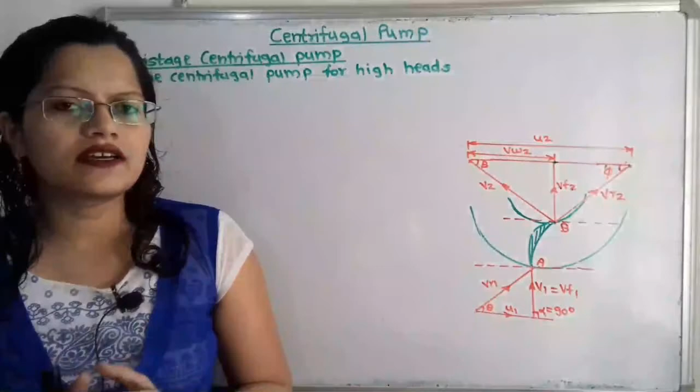In this video we are going to solve a problem of three-stage centrifugal pump for producing high heads. But before that we will understand the construction diagram for the multi-stage centrifugal pump to produce high heads.

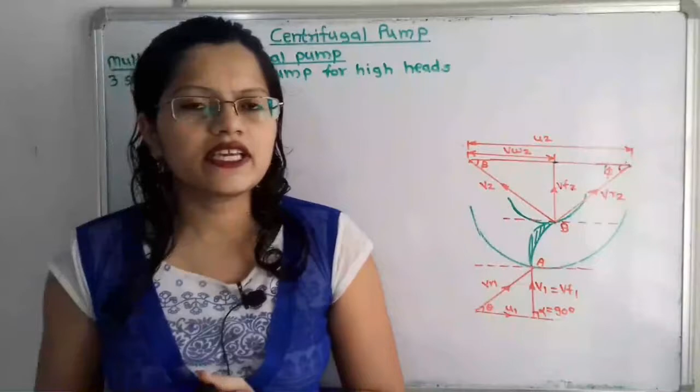If we observe this diagram, the impellers are connected in series, or we can say they are connected on the same shaft. At the entrance of the first impeller, water is entering from the suction pipe and it is getting discharged to the first impeller. So what is happening during this process?

When the water passes from the first impeller, its pressure is getting increased, and with the help of the connecting pipe, this increased water pressure enters into the second impeller. Again, when it moves to the second impeller, its pressure is getting increased.

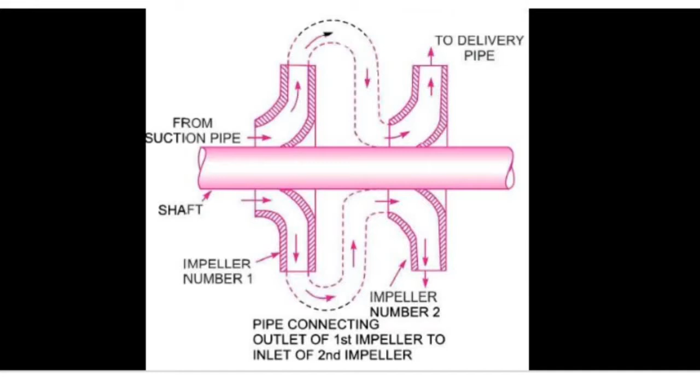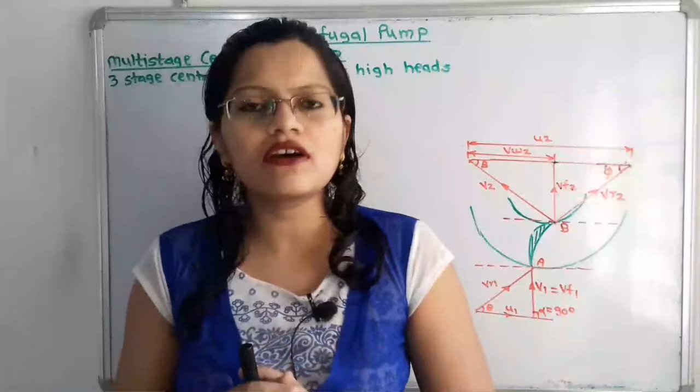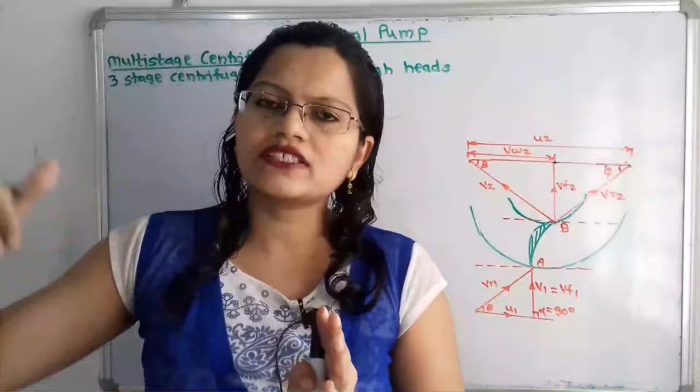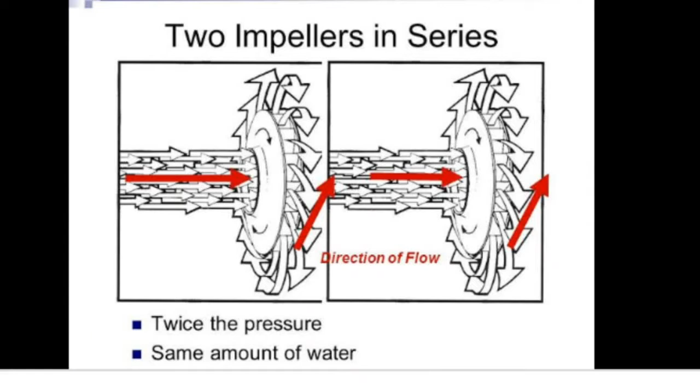If we compare the pressure between these two impellers, the pressure in the second impeller is more than the pressure in the first impeller at the outlet. So if a number of impellers are connected in series, the pressure keeps getting increased, and when the impellers are connected in series, the discharge passing through each impeller will remain the same. So we are going to produce high heads, but the discharge will remain same.

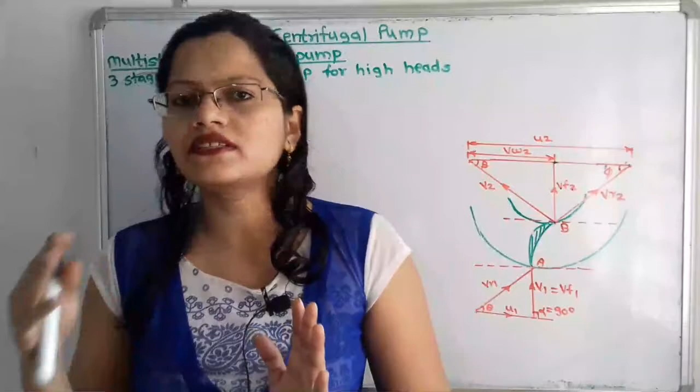Now I will read what is the given problem.

A three-stage centrifugal pump has impellers 40 cm in diameter and 2 cm wide at outlet. The vanes are curved back at the outlet at 45 degrees and reduce the circumferential area by 10%. The manometric efficiency is 90% and overall efficiency is 80%. Determine the head generated by the pump when running at 1000 rpm, delivering 50 liters per second. What should be the shaft horsepower? So this was the given question.

Now we will understand the given data and we will also take the reference of the velocity diagram for this centrifugal pump. For how to draw the velocity diagram, the link is given in the description box, please refer that video to draw this diagram at the inlet and outlet tip. Now what is the given data here?

If we observe, the number of stages n is equal to 3, then d2, the diameter at outlet, is 0.40 meter, and width is also given, that is 0.02 meter. We have to use the standard unit, that is meter, so when these dimensions are given in millimeter or centimeter, we have to convert them into meter.

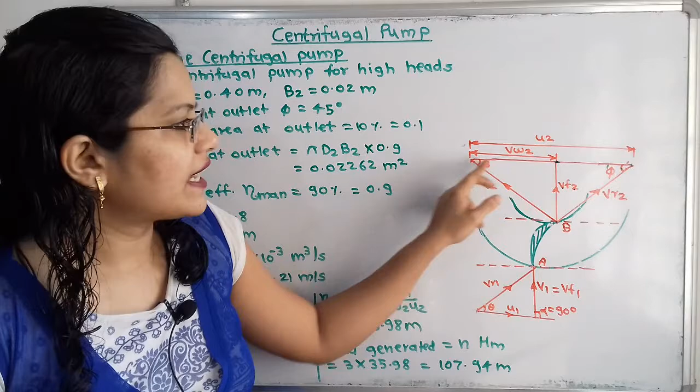Then the vane angle at outlet: it is given that at the outlet tip it is curved back with this tangential velocity at an angle of 45 degrees. This is the vane angle at the outlet tip, denoted phi, and phi is equal to 45 degrees.

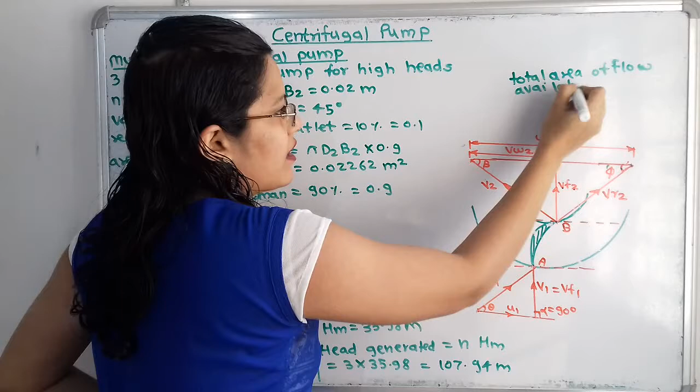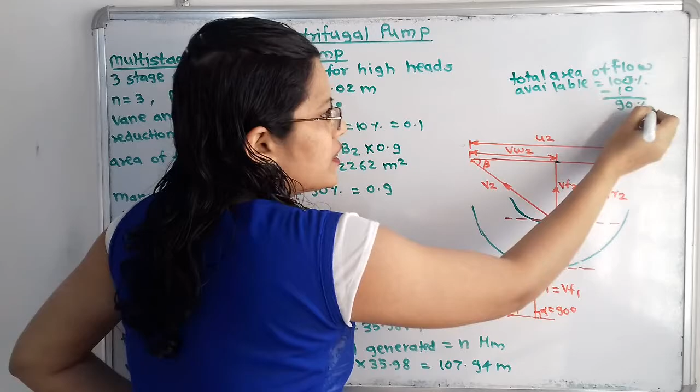Then reduction in area at outlet is 10%. So at outlet, what is the total area of flow available? Suppose we consider this as 100%, then there is a reduction of 10%, meaning we have to subtract, so the total area available is 90%. Initially there was 100%, but there is a reduction in area of 10%, so the total area of flow available is 90%. Now what is the area of flow at outlet?

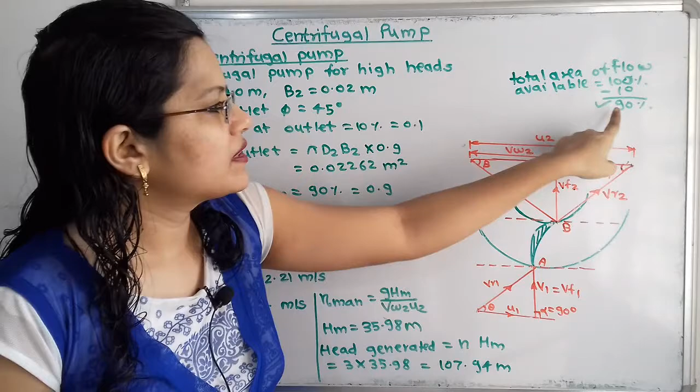For that we have to write the total area of flow, which is calculated as pi d2 b2. When we calculate pi d2 b2, the total area of flow available is 90%, which is equal to 0.9, that is 90 by 100. So we have to multiply by 0.9 because this is the area available for flow, since the condition given is that there is a reduction in area at the outlet. So it is pi d2 b2 multiplied by 0.9. d2 is there, b2 is also there, so which is equal to...

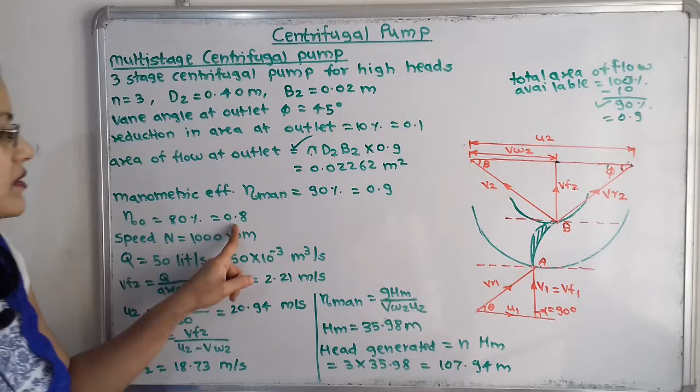0.02262 meter square. Then manometric efficiency is given as 90%, that is 0.9, and overall efficiency is 80%, that is 0.8. Then the speed of 1000 rpm is given.

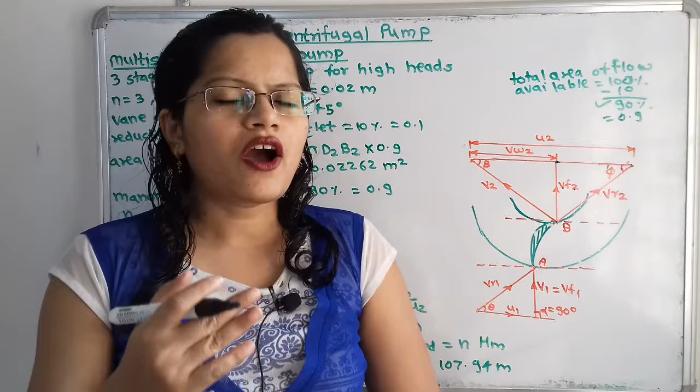Now we are going to calculate the first question, that is the head generated, for this multi-stage centrifugal pump. We know that in a multi-stage centrifugal pump, the discharge remains the same, but by each impeller the head keeps getting increased because of increased pressure. So how can we find out this head generated?

Head generated is the number of stages, small n, multiplied by the head that is getting increased by each impeller, that is hm. So we have to first find out this term hm.

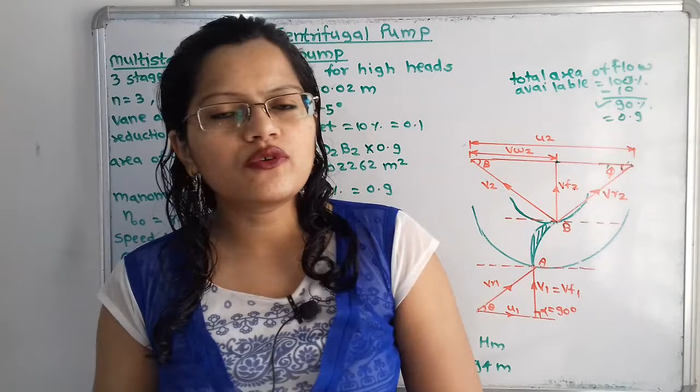So how do we find this out? If we observe the formula for manometric efficiency, it is given as GHM divided by VW2U2. So this manometric efficiency is known, G is known, then VW2 and U2 we have to find out.

If we observe this data, VW2 and U2 are not given. So when we use this formula, we will first find out the value of VW2 as well as U2. So how do we find out U2?

We have the formula, that is pi d2 n by 16... sorry, by 60. d2 is known, n is also known, that is given as 1000, and when we put the value we get U2 equals 20.94 meter per second.

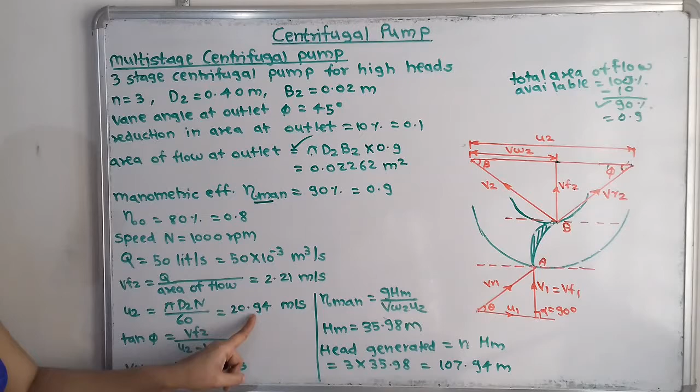Now how do we find out VW2? If we observe, this angle phi is known. So if I take tan phi, which is equal to Vf2 divided by this side, and this side means U2 minus VW2. For that, again I have to first find out Vf2.

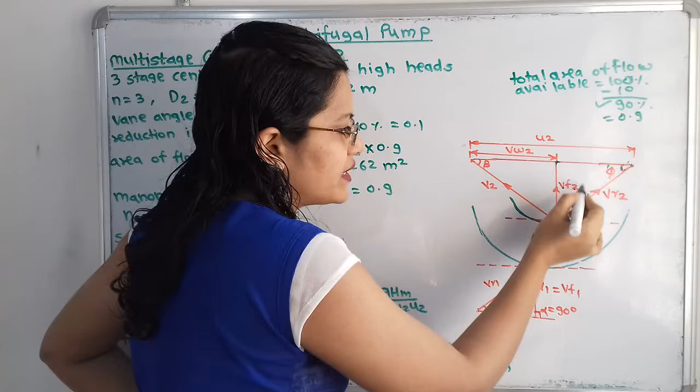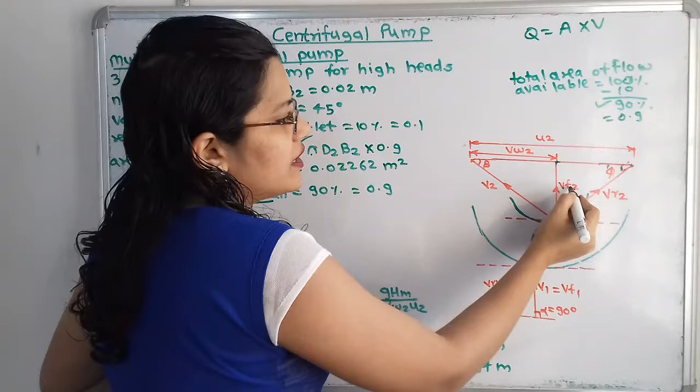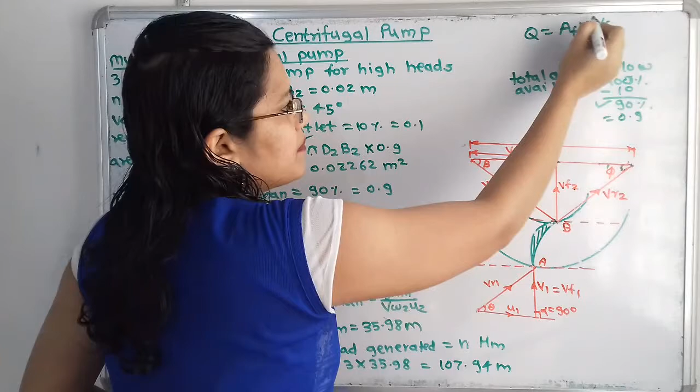So how do we find it out? Vf2 is the velocity of flow at outlet. How can I find it? We know that discharge Q is equal to area into velocity, but here we have to calculate the velocity of flow, so I will take the area of flow. Discharge Q is equal to area of flow multiplied by velocity of flow, and since it is at outlet, I will write the suffix 2.

So what is the area of flow at outlet? That is getting calculated. Then what is discharge Q? Discharge Q is given here as 50 liter per second, and we have to use the standard unit, that is meter cube per second. Taking these two values, Vf2 is equal to Q divided by Af2, and when I take these two values, I get 2.21 meter per second.

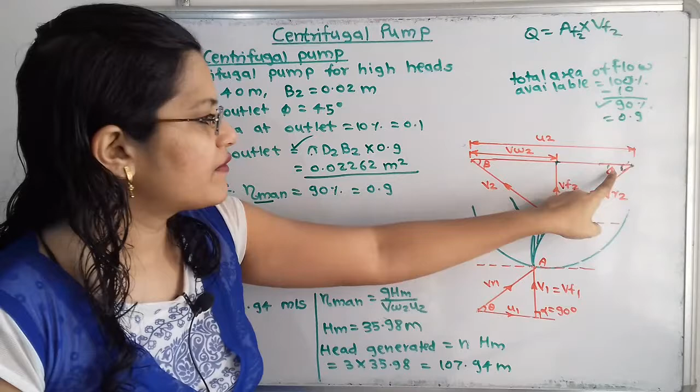Now again I move to tan phi equals Vf2 divided by U2 minus VW2. Phi is known, given; Vf2 we have calculated; U2 is also a calculated value; so only one unknown term remains, that is VW2, and VW2 is equal to 18.73 meter per second.

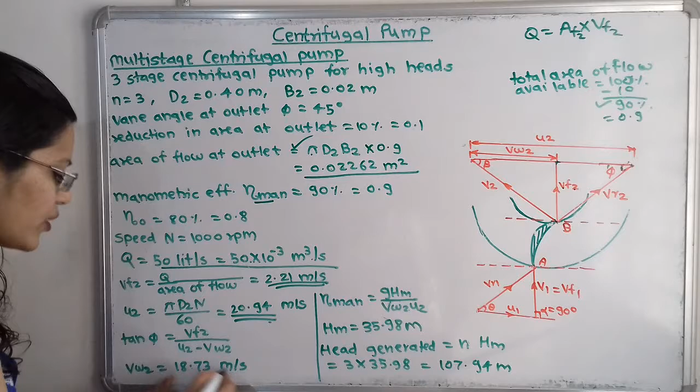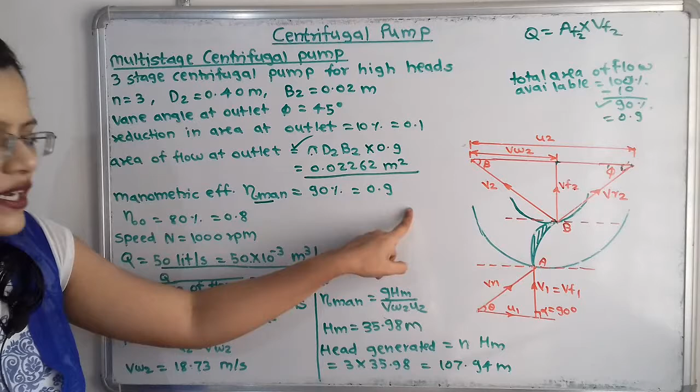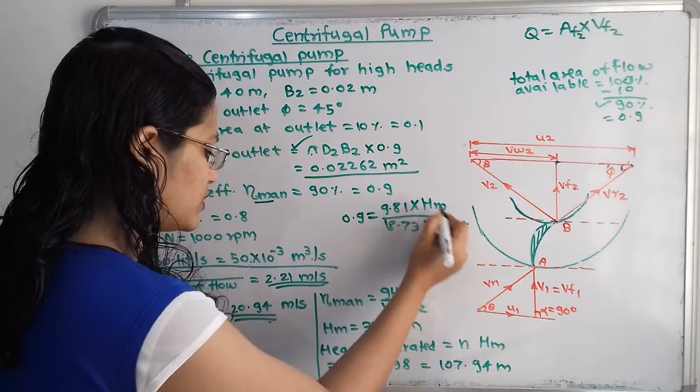Now I will put the value in this formula. Manometric efficiency is 0.9, so 0.9 is equal to 9.81 into HM, which we have to find out, that is the head produced by each impeller, divided by VW2 multiplied by U2. VW2 is 18.73, multiplied by U2 that is 20.94. So this HM is 35.98 meter.

Head generated is N into HM. N is the number of stages, which are 3. So 3 multiplied by this value gives 107.94 meter, and this is the answer to the first question.

Now we move to the second question, that is we have to calculate the shaft power. If we observe here, the overall efficiency is given, and overall efficiency is output by input. So we have to first calculate what is the power output by the pump.

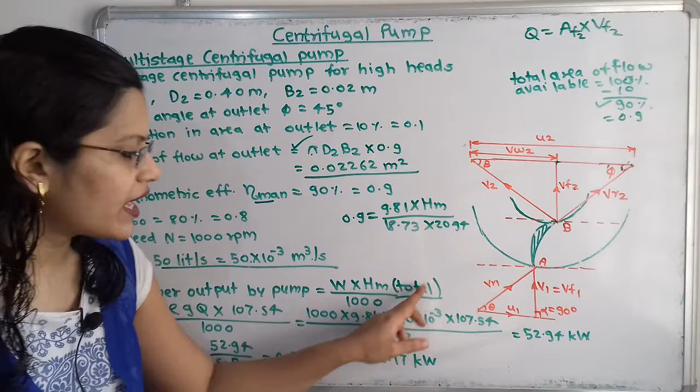What is the formula here? We are going to calculate total power output by the pump, meaning we have to consider all the stages, or the head produced across all stages. So it is W into HM divided by 1000. Remember this is a multi-stage pump, so we have to take HM as the total head produced by the pump, and W is the weight of water, divided by 1000.

So what is the weight of water? That is rho into G into Q. Rho is the density, G is 9.81 meter per second square, and Q is the discharge, that is 50 into 10 raised to minus 3. When I put all the values, divided by 1000, and take HM total (the total head produced, calculated in the first question) as 107.54 meter, the 1000 gets cancelled, and we get 52.94 kilowatt.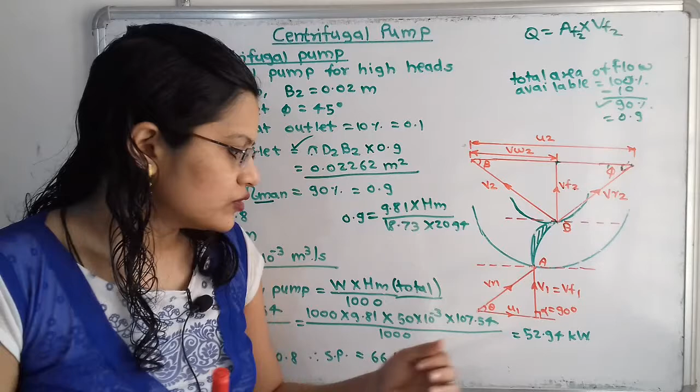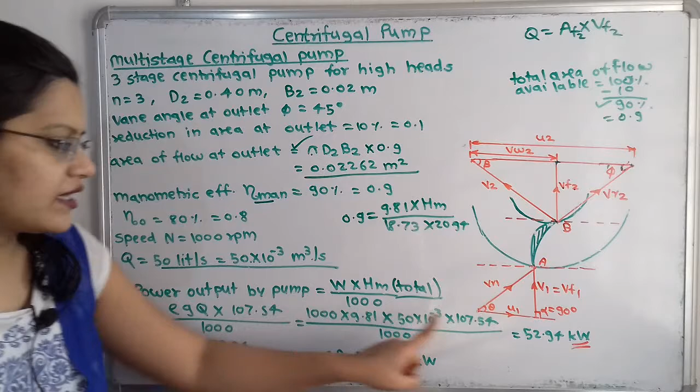So when we divide by 1000, we get this answer in kilowatt. Now we have to find out the shaft power. We take overall efficiency, eta O equals 0.8, which is equal to output by input. Output is the power output by the pump, that is 52.94 kilowatt, and the input is the shaft power.

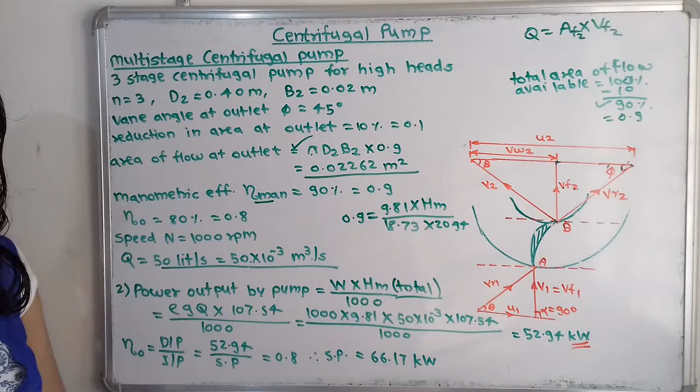If we observe here, only shaft power is the unknown term. So how do we get the answer? We take shaft power to the right hand side, that is 52.94 divided by 0.8, which is equal to 66.17 kilowatt, since this term is also in kilowatt, so we have to take the same unit.